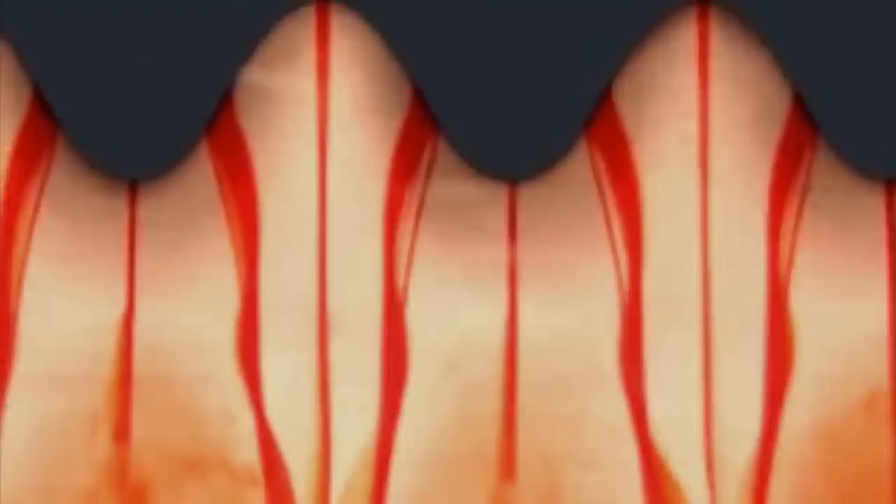Of course, what they did was make a patent on it. Patents are funny things, incidentally. One of the things a patent doesn't cover is private use. You can do this as long as it's non-commercial, or you can do it for education and research papers. Patents protect commercial use, so putting it into a patent means for private use, anybody can do this.

And that made me think, okay, what about if I stick some of those nodules or tubercles along this shape, seeing as this shape is so much like a whale's fin, would that give me an improvement?

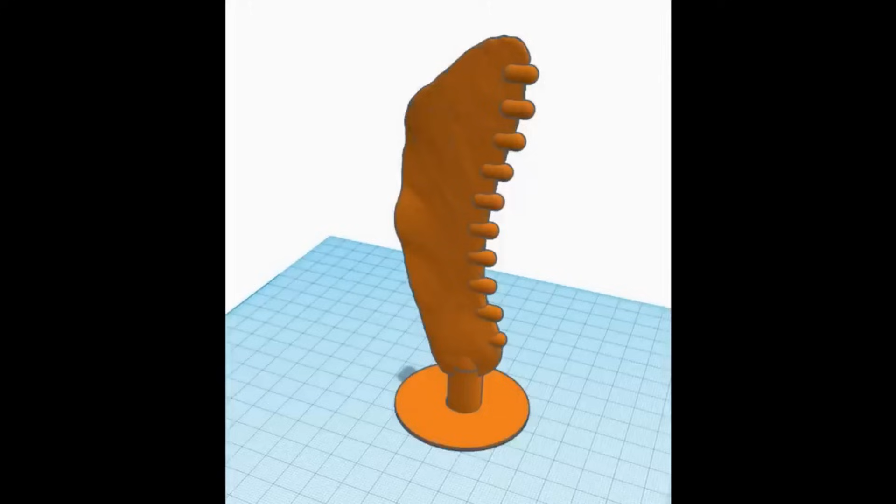Of course the first step is to stick a load of tubercles on, which is exactly what I've done here. Now, I'm going to update the file on Thingiverse and add this as an extra print if somebody else wants to test it and see whether it works or not.

But I've printed this off. Now let's print off 3 more and the nose cone. There we are with exactly the same structure, nose cone, 2 of the fins on and a handle, so I can hold it, a bit of steel rod going through 2 bearings, and it's free to spin in the wind.

So we put those on in the same way that we put this on, and we have 2 of those, and now we can have a sort of side-by-side comparison.

So to test that, we've come to a hill near where I live because we get a reasonable amount of wind. There isn't a lot of wind today anyway, but we'll do that test, and the test is going to be pretty simple. We're going to hold the 2 up together in a wind and see which one turns soonest and which one turns quickest, and that'll give us an idea of whether this is BS or not.

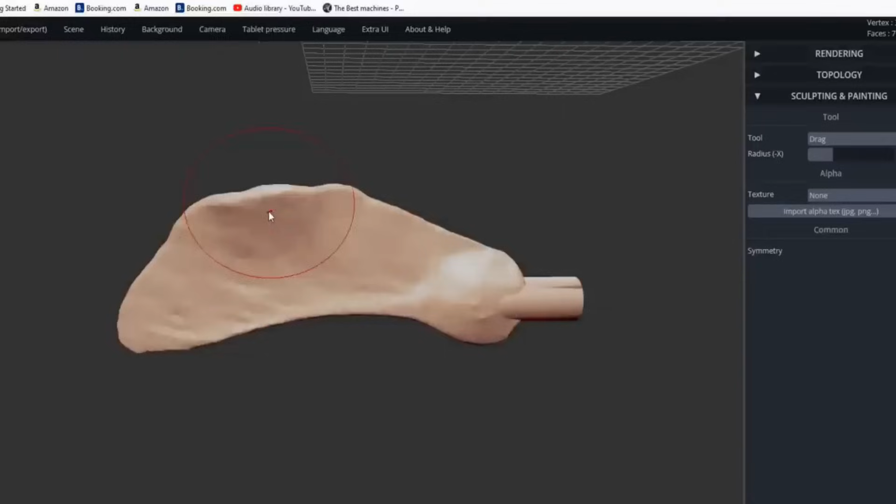So instead of brush, where we're going to lay things on, what we want is drag. If we hit drag, we'll be able to pull that as if we were pulling it. So we go over it and then pull it, and it will pull it out.

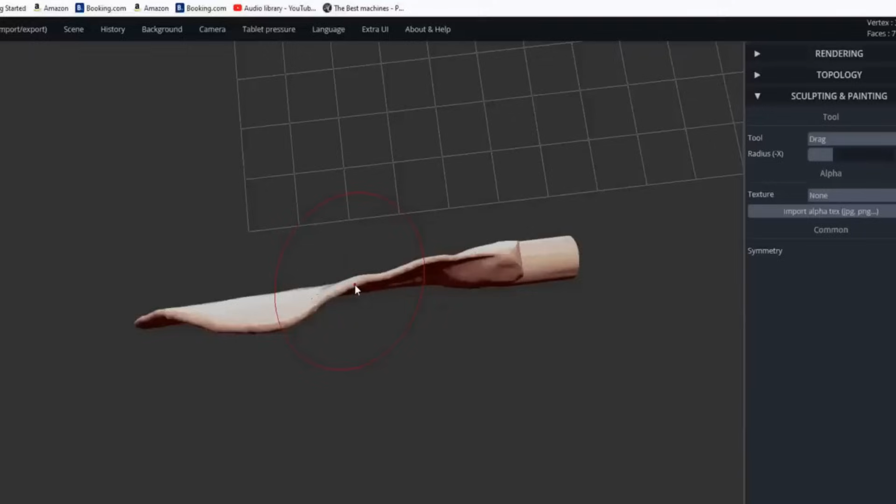That's so cool. Equally, if we go here and push down, it'll push it in. Now you'll notice there are actually 2 red dots appearing, that's because we've got symmetry turned on. If we turn symmetry off, then we'll only get 1 red dot appearing, and we can push with that 1 red dot on the area we're actually interested in.

I've got the grid showing here. Let's hide that grid. And there in scene, we've got show grid. Let's turn it off, and we've got hide grid.

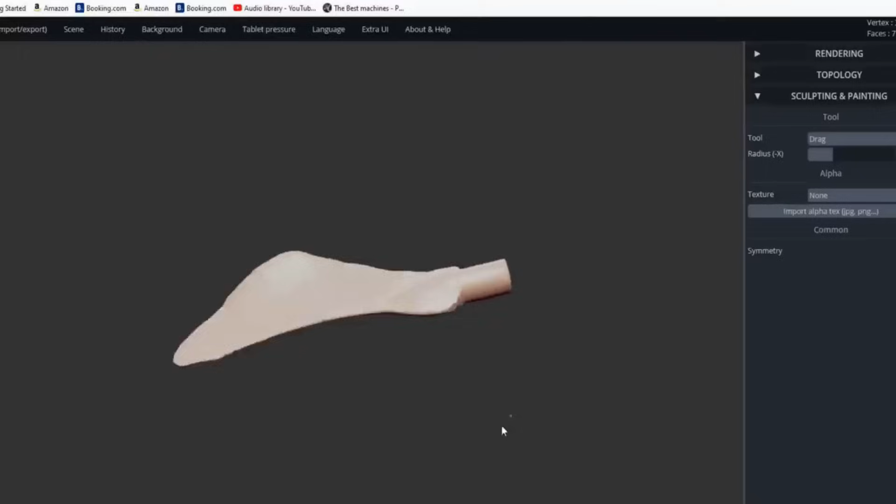In order to move in and out of this, you use the scroll wheel on the mouse. In order to spin around it, either right or left click, and you can spin around the model by going to different places and just spinning it around. If we want to move the actual model so that we can get closer to it, hold the Alt key and then left click and drag.

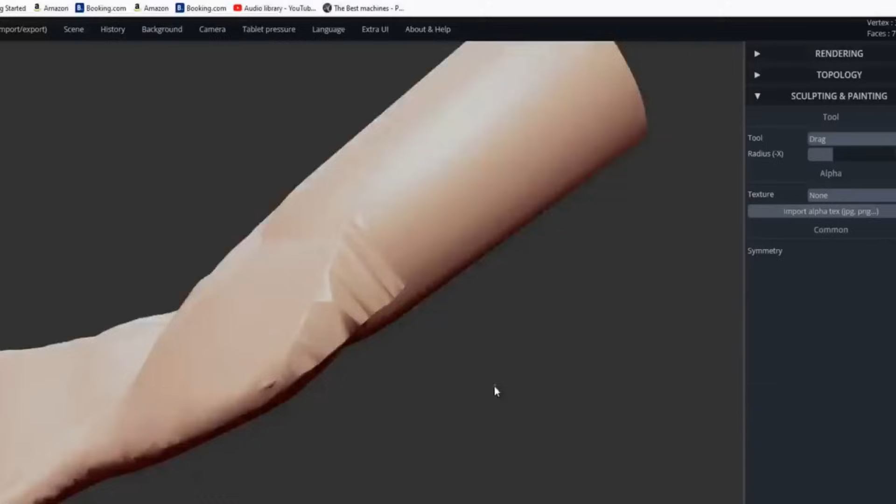What we're actually doing is moving the camera position, but it looks like we're moving the model. So we can move the model, and then we can zoom in on a particular portion that we're interested in. Then without holding down Alt, we can spin it around, and we can see how jagged that actually is.

To remove that, what we want is the smooth tool, and then we can smooth that area just by painting over it, again as if we were pinching it. That is beautiful. And then we can just smooth those edges to make them nice and smooth.

Again, if we go out and spin around the model a little bit, then if we get a lumpy area, we can choose to flatten it, or we can pinch it out, or we can smooth it, or we can do something called inflate. Inflate is where there's an area that maybe is a bit thin for you. So for example, here, let's inflate that.

And then if we hit inflate on there, what it'll do is act as if we're blowing behind the clay, and we'll fill that area out. And we can thicken up our leading edge by doing that.

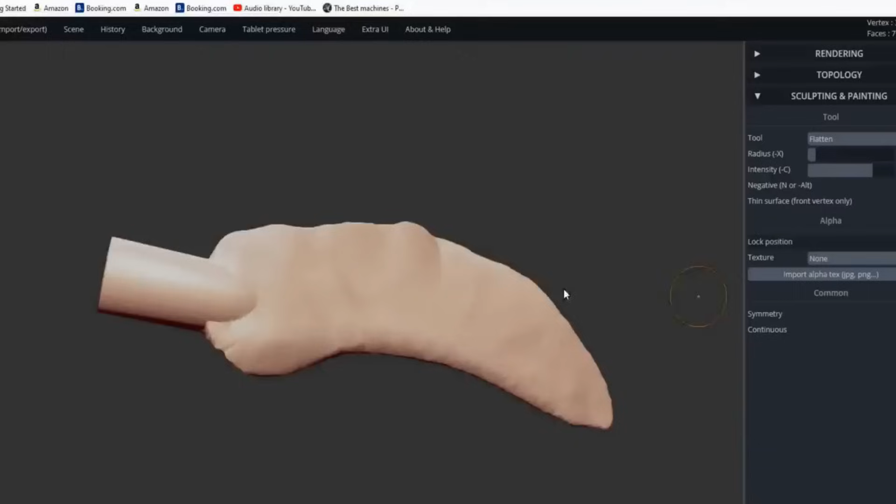And if we feel that's a bit too puffed out, of course what we can do is flatten it. And then we keep on doing that, dragging, pinching, flattening, smoothing, just like you would with plasticine or clay to get the shape that you want. So let's do that.

Okay, so this bit is actually magical. If we hit smooth and then smooth over the area, you can see all those nasty little lumps and creases disappearing as we smooth it.

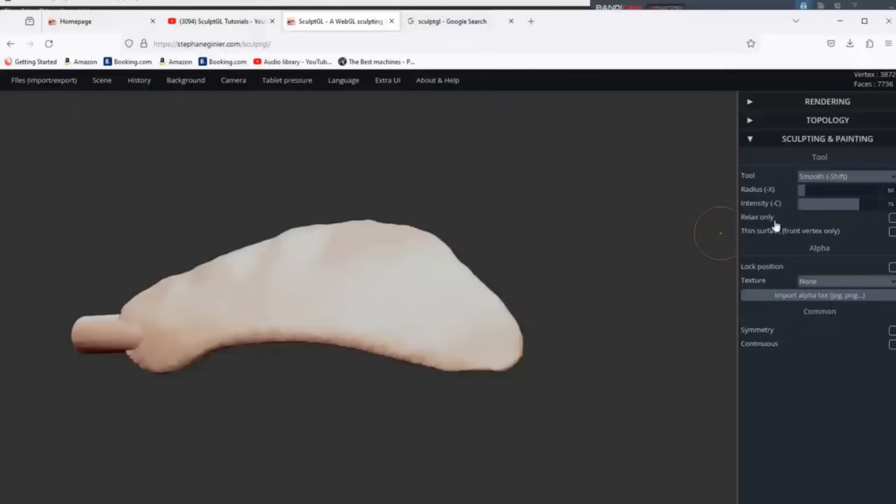Now you can change, if you look at that red circle, that's the radius of the smooth brush we're using, and as we use this slider bar here, we can change the area of the red circle, and that's where the influence of smoothing will be. This is true for all of the brushes, so we can smooth a huge area.

Okay, it's quite addictive, but once you've done that, of course, what you'll get is your rectified STL file, and that's our 3D model that we've smoothed everything out. We've pinched out the trailing edge so it's sharp, we've inflated the leading edge so it's got a bit more of a cut in it, and then we've smoothed all the edges out so it's more like a blade and less like a sycamore, and it's much more even.

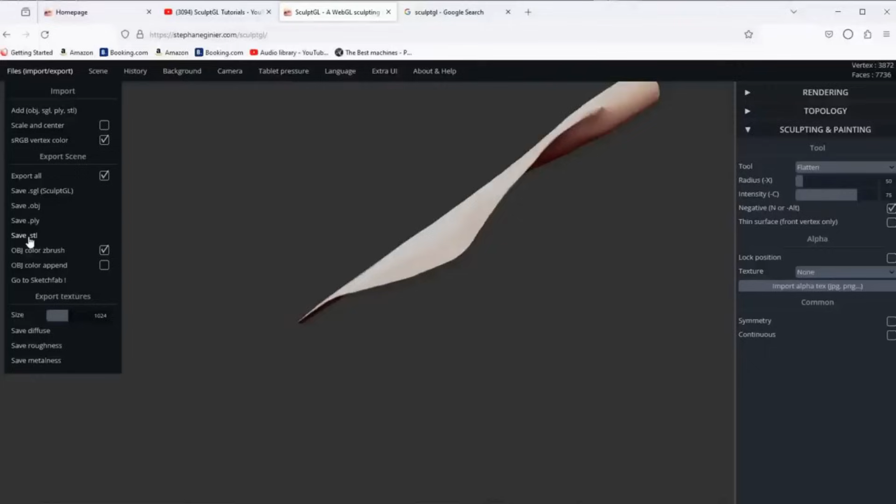So of course we can now export it. We export it by saving it as an STL, and there it is saved. Now let's print it.

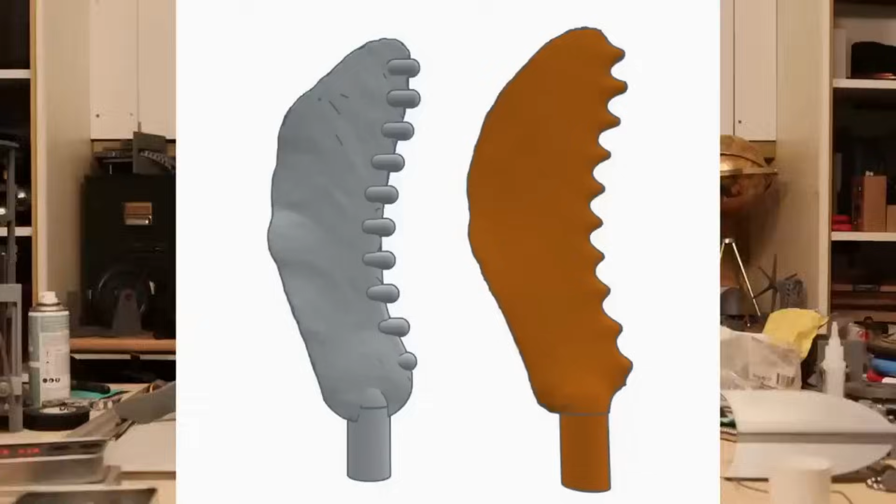And there it is printed, and it looks much more beautiful indeed. This is nice and thick like it should be, this is nice and thin, and as this was printing I checked the wing profile and it's much more like an NACA airfoil than it was here. We've also taken this drop out here a bit so that we've got a nice curve on there, so very much a nicer job. Of course what we want to do now is this one here, which is very lumpy, and of course I've done that, and this is what they look like in comparison.

So I want to print this one out and then we'll get a nice look at that, because this one is obviously a bit of a blade in general, and this one is one of the things I want to test. So these two blades, I'll be putting them on Thingiverse in case you want to have a look at them or play with them, but the whole idea has been to use SculptGL to take out the things that we can't get when doing combinations of scanning and modelling, to make them much more organic in their approach, and presumably they'll perform much better.

Now, this idea of sculpting in clay as a process is gaining a lot of ground when it comes to 3D modelling, and the things people are doing with it are amazingly incredible, and it is super intuitive. It was maybe 10-20 minutes before I was using that program - it took me an hour to learn how to use the cursor in Blender, and 20 minutes later I was producing something in this program.

So it's well worth giving it a go and adding it to your armory. Without a doubt there's always going to be people who say, why bother, just learn one program. Sure, but the problem with a program like Blender is it's just too much - you're never going to use those things, because all we want to do is smooth out a few curves. We don't want to make a 2-hour animated film of all the characters we've generated, and for that something like SculptGL is another string to your bow.

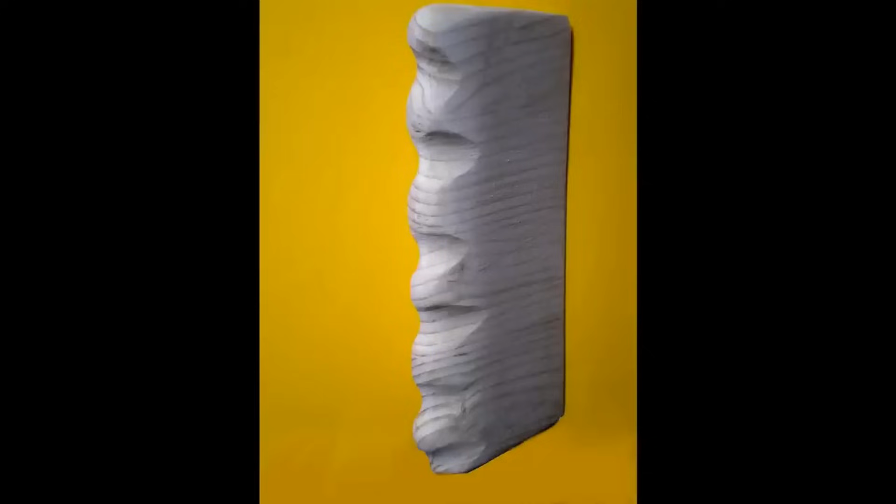Now if you look at the models that were made, they've been carved out of wood. The beginning of this is a wooden one. They've been made out of carved polystyrene, carved various bits and pieces, built up from clay, and although they tend to be sinusoidal, when you think about the nature of them, being a bit rough and uneven doesn't actually seem to make that much of a difference, so we can quite happily sculpt these in.

And when we're happy with what we've got, we can smooth the whole surface just by dipping your hands in some water and giving the clay a rub, and it will smooth everything out and make a nice smooth surface. When you're happy with it, which is pretty much where I am with this, we need to leave it to dry and make some kind of permanent representation.

Now of course I've got a scanner, so I'm going to scan this, but we could just make a mould of it by pouring some plaster of Paris around it when it's dry and leaving a split line, and then you'd be able to make as many as you wanted. So there are lots of ways to make a mould, and to turn it into a permanent model I'm going to scan because I have a scanner.

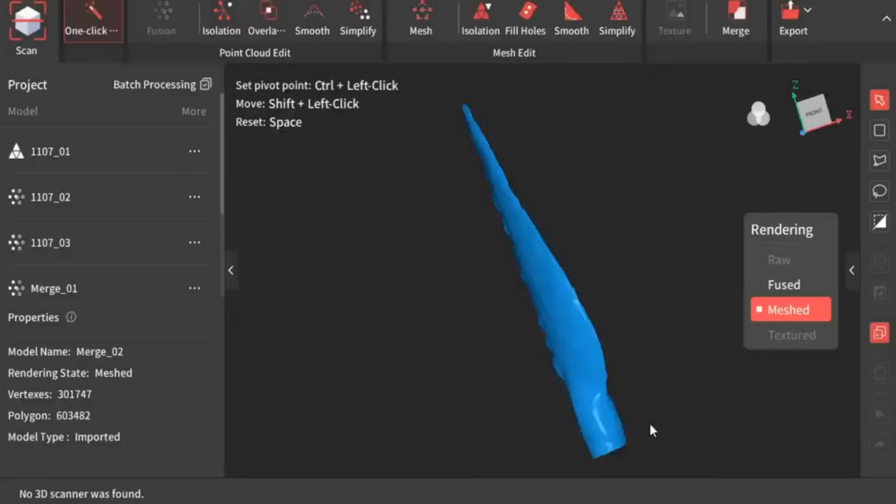And there is our 3D model of the Ingenuity blade with its tubercles. Now all we've got to do is print it off. Okay, and there it is printed out, and to be honest it's really quite beautiful, those curves are really smooth. So we've gone from this, the original Ingenuity blade, made this clay model with the tubercles on it, and then scanned it and brought this out, though we could have cast it.

Now, for all those who want to point out to me that I could have done this entirely on the computer, well, you are entirely right, but you may have missed the point, because there's a moral to this story. The moral is that the best way of doing something is always a balance, and different for different people, because it's a balance between the materials you have available, the knowledge you've got, the skills you've got, the tools you've got, and your own particular bent for the way you like to work. There is, in fact, no real best. It's one of those illusions that we seem to believe in.

Now, don't get me wrong, I think suggestions on how to improve things are awesome. But there's a difference between a suggestion on how to improve and telling somebody that's the only way to do something. If you're telling somebody that's the only way to do something, to be honest, you're wrong, because there's always loads of ways of doing any particular job, and half the time, if people think there's only one way, they just won't try and they'll give up. But there's a myriad of ways.

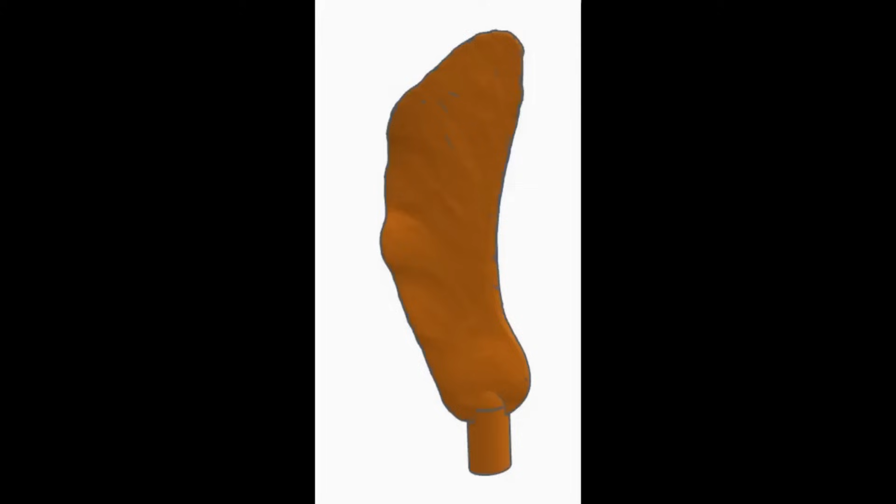So I've got this pedestal fan, and I've got it because I want a production fan blade - this must be pretty good at blowing air over you. The reason I want that is because I want to compare this to our Samara Seed wind turbine blade, which is supposed to act as a fan. Remember we covered this in tubercles to make this, and they were rather lumpy, so we smoothed those tubercles out to make this beautiful shape here.

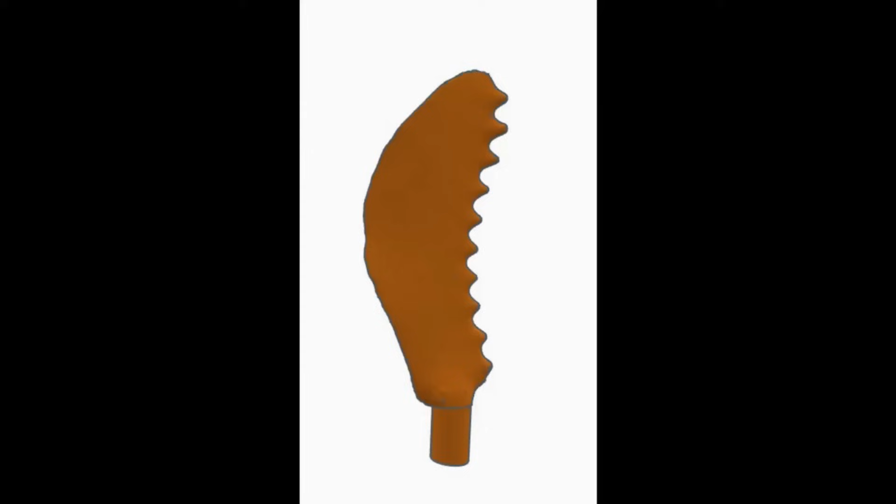Clearly what I've done is printed 12 of them and arranged them around that fan, because although we're doing it this size so we can get some kind of measurement out of it, if it's right that it's better and quieter, then it would make a brilliant PC fan. But we want to do a quick test on it, so we're going to do some kind of comparison between that and that to see how they do.

Now of course this is all on Thingiverse, and you can just download it, but there's a couple of things I want to point out to you. This thing, I want it to blow air over me. I want to take the air from behind and push the air out. So it looks like they're reversed, because this bit is the bit that should be cutting the air.

It should be spun that way so it can cut the air and then blow it out. If I twisted these in the other direction, I would have to spin it that way to do the job. So the only difference a twist makes is whether you spin it clockwise or anti-clockwise. If you want to spin it one way, twist it one way; if you want to spin it the other way, twist it the other way. So in that direction, I need to spin that anti-clockwise when seen from behind to get it to cut the air and blow the air over me.

What we need to do is see if we can get a measurement out of that, and have a listen, and see whether we can find out if it's actually quieter or not. So to do that, what I've done is I've stuck this blade on a bit of steel and I'm going to turn it in a hand drill so I can turn it clockwise or anti-clockwise to see which one might work. And I've got an anemometer, and I'm going to put that as close as I can get so it's blowing air over the anemometer and see if we can get a reading out of it. And obviously I'm going to do that with both of them.

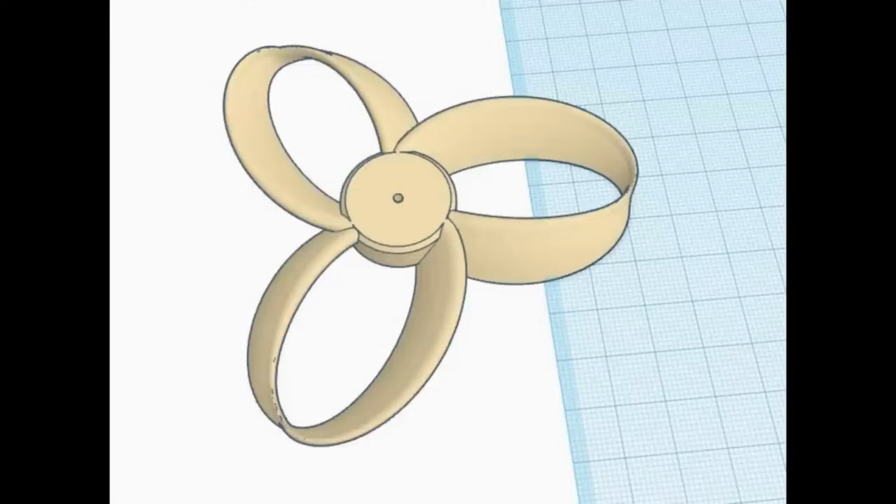So we compared that against that, and it was a bit rough and ready, but it certainly gave the impression that that worked better, and a lot of people pointed out that the test perhaps wasn't as fair as it could have been, and they were right, it wasn't. It was an impression. However, we do have this: the latest and greatest popular fan blade, the toroidal blade, that is supposed to work more efficiently and quieter than a standard blade. And I've tested this in a fan and it's certainly quieter.

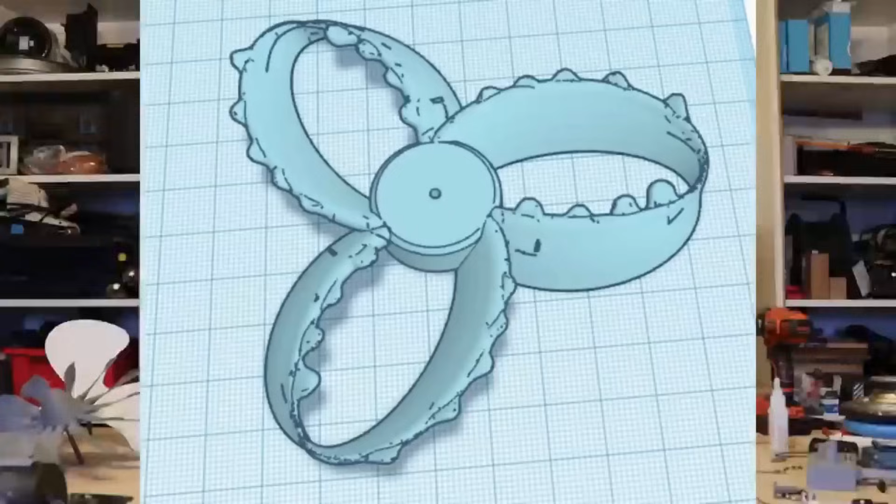So what I thought I'd do is test this with an identical one, but with tubercles added on, because I can print them and control that. So this one is without tubercles, and I got it from here. It is basically only 4 parts - well, 5 parts actually, if I think about it. There's the toroid blade, there's a foot, there's a cap, there's a body, and then there's this little motor that I got from Amazon that fits right in there.

And we can make a toroidal fan without tubercles first. That motor presses into the body, the toroidal fan actually goes onto there like that. It's a little bit of a press fit, but so it should be. And the front will glue on there, and the foot will glue on with the wire sticking out. So I've got it on a 3-volt battery, linked up in series, and we're going to read the amps and see how much speed we get out of the airflow.

That was 2 meters a second. So that one without tubercles was about 165 or 166 milliamps, and it pushed out about 2 meters per second on the airflow. Now let's give it a go with this one.

This one is the same thing, but it's just got the tubercles added, and we'll do the same stuff. We'll set it going, have a read at the amps, measure the wind speed, and see what we get out of it.

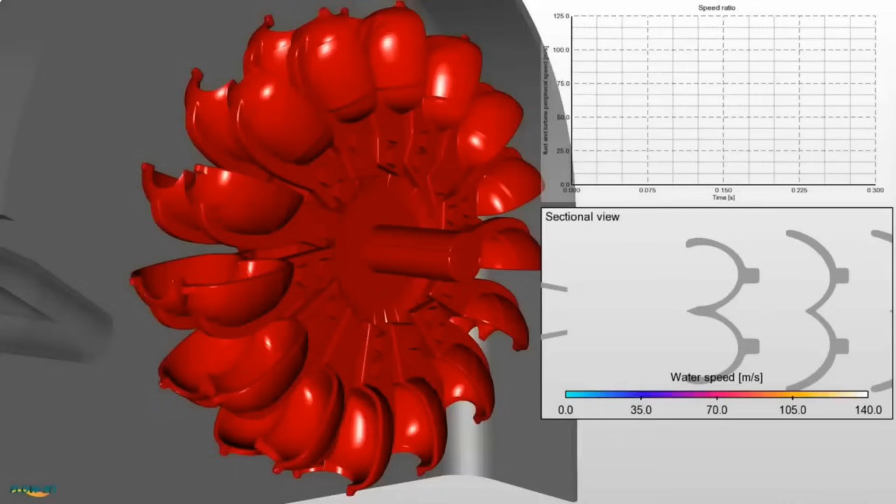Traditionally, there are two ways of doing that. The first way was just to use the dead weight of water to push a wheel - that's exactly what a water wheel was. But that has its limitations; they're not very efficient, so turbines developed, using a different method. Perhaps the most successful and efficient turbine is the Pelton wheel that came along in the 1870s.

It uses a jet of water aimed at some buckets, and it's what's called an impulse turbine. It can use the kinetic energy of the water and extract that energy as rotation. Later we got reaction turbines that extract both kinetic energy and pressure energy from it. But given this came from a whale, we should be able to turn it into a turbine blade, point a jet of water at it, get it to rotate and extract some energy out of it - or at least that's the idea.

So to explore that idea, I've created this turbine blade - just a smaller version of this. I took this design, chopped it off, shrunk it down a bit, and stuck it onto a PC fan. PC fans are great for testing because they're really easy to turn into generators. You just snap off the blades, take out the electronics, and solder a couple of wires to the coils you'll find inside.

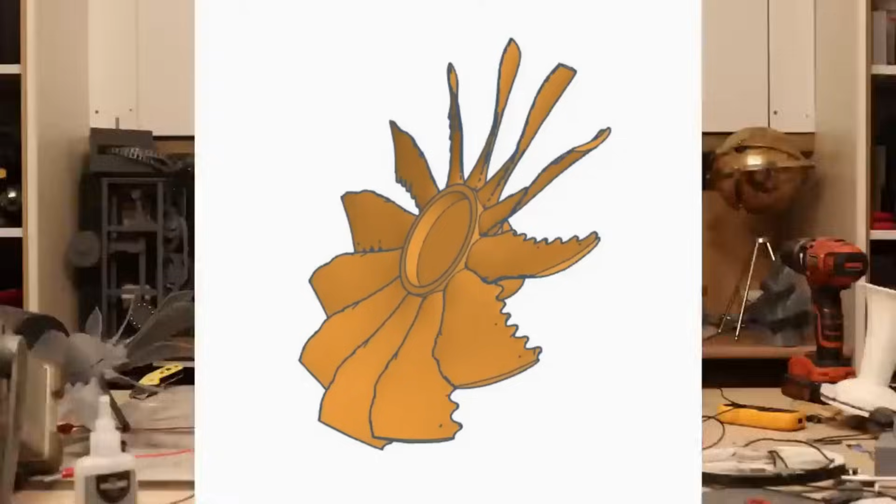So what I've done is taken this, and there's a little indentation on the reverse side that exactly fits on there - that's an 80mm PC fan, incidentally. I've glued that on and glued it to this backing board to hold everything stable. And what we're going to do is take this, point a jet of water at it, and see what happens.

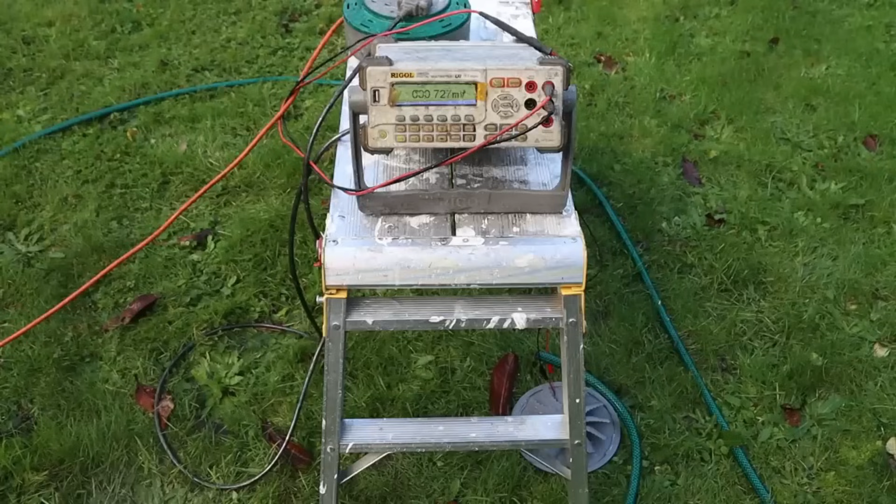Okay, we brought it outside. Let's turn the garden hose on it and see what happens. I mean, partly we know what's going to happen - I'm going to get wet.

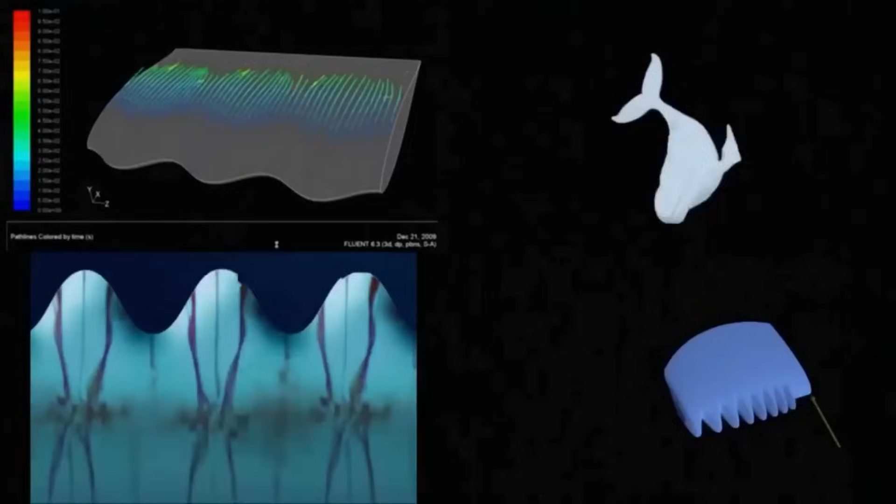Okay, that was cold. Now it definitely worked as a turbine. I couldn't tell you which kind of turbine it was, whether it was impulse or reaction. But apparently, when the water hits that blade at the point of the tubercle, the flow is separated, and that's part of why the drag decreases and the lift increases.

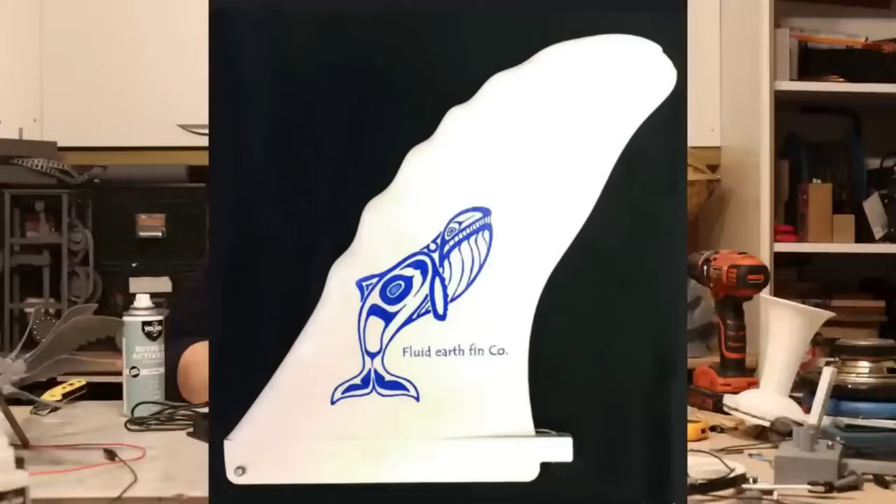Now these are beginning to creep in everywhere. You're seeing them in wind turbines at the moment. They've started to be put onto wind turbines and supplied as a kit for you to modify your own wind turbine. And you find them in slightly more bizarre places, like the fins of surfboards, that kind of thing.

But I've yet to see anybody looking at these in terms of water power generation. Now we use a water jet, but I would think with something like the Wave Dragon, for instance, it might be an interesting way to look at something like that.

The demand for sustainable and renewable energy resources has certainly intensified in recent years, probably due to the increasing global concern about climate change and the depletion of traditional fossil fuels. Among those various renewable energy options, wind power stands out as promising and eco-friendly, with the whole area probably being dominated by the traditional horizontal axis wind turbine.

But these turbines, well, they're not without their problems. They're prone to lightning strikes, and I consider them probably quite lethal to the local wildlife. If they're not built properly, they have a terrible propensity to fall down, because they only really work if you stick them up there in the air. If they overrun, that is, get too fast, the consequences can be catastrophic. And every now and then, they have a terrible habit of bursting into flames for one reason and another.

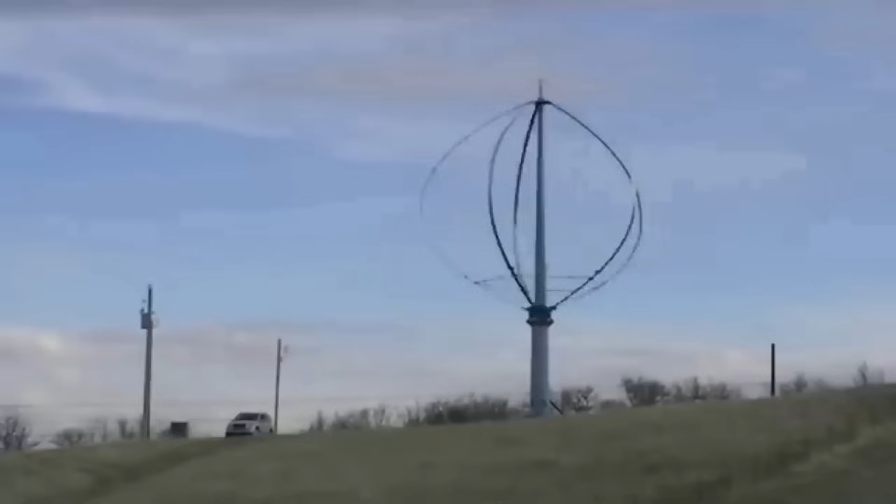There are several designs of VAWTs, the most common being types of Darrieus, Savonius and helical designs. The Darrieus design, characterized by a curved blade arranged in a helical shape, is particularly popular for its efficiency and aesthetic appeal. The major advantages of VAWTs are omnidirectional wind capture, simplicity and durability, low noise levels and scalability.

And the disadvantages, or if you like, the challenges and considerations? Well, the first one would be startup torque and cut-in speed. VAWTs typically have higher cut-in speeds and require a minimum wind speed to start generating power, and that can be a limitation in areas with lower than average wind speeds.

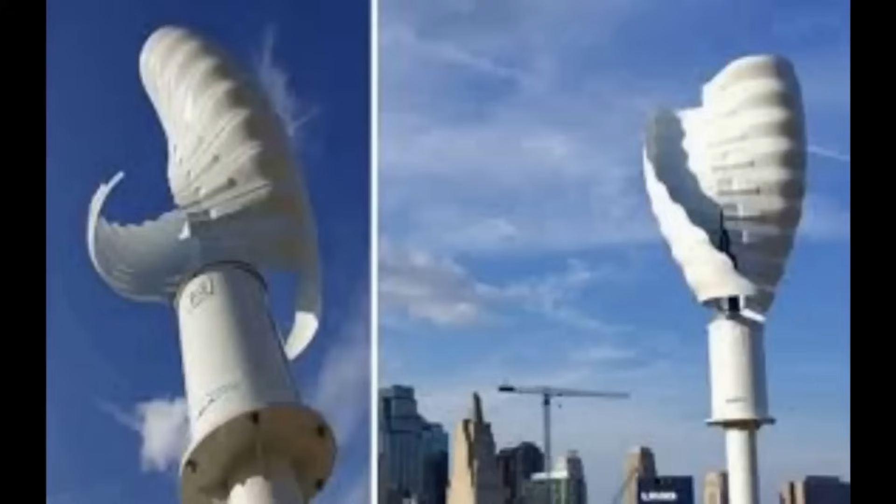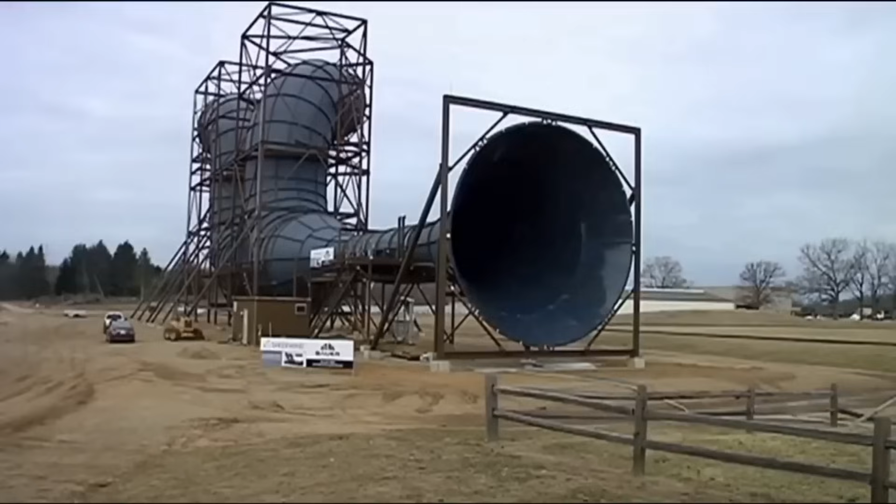The second is efficiency at low wind speeds. While VAWTs are brilliant at capturing wind from various directions, their efficiency at low wind speed is generally lower compared to HAWTs. And the final one is aesthetics and public perception, because although the unique designs of VAWTs can be appealing, some folks find them less appealing than the conventional HAWT with the familiar three-blade design. Public perception and aesthetics can seriously impact the widespread acceptance of new technology like VAWTs.

But generally, VAWTs are a promising avenue for harnessing wind energy with distinct advantages. However, more work is required.

In the quest for more efficient and sustainable energy solutions, researchers and engineers are increasingly turning to nature for inspiration. Biomimicry is the practice of imitating biological systems and processes to solve human problems, and that's led to innovative designs across a whole range of industries, the notable example being the integration of whale tubercles into wind turbine design.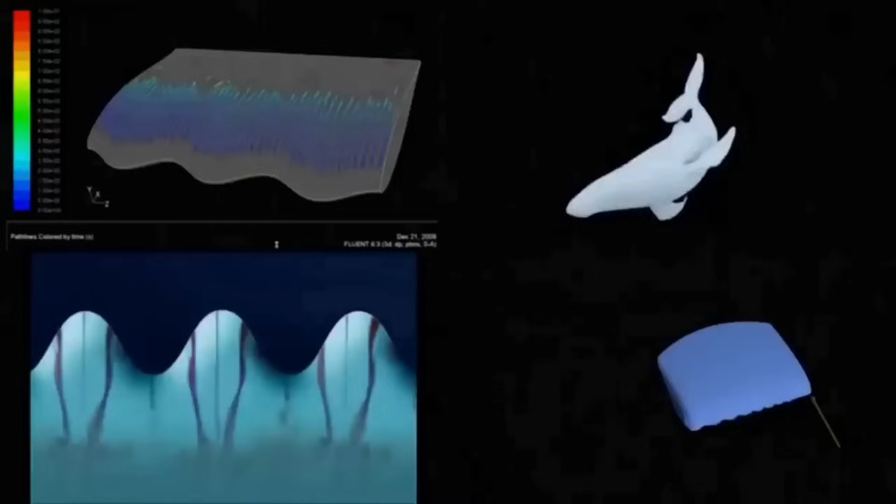Whale tubercles are small rounded protrusions found on the leading edge of humpback whale flippers. These tubercles are not merely pretty, they serve a critical purpose in optimizing the whale's hydrodynamic performance. Researchers revealed that these bumps alter the flow of water over the flipper, reducing drag and increasing lift. This, of course, makes it a natural adaptation, and that's captured the imaginations of scientists and engineers seeking to enhance the efficiency of man-made structures.

Particularly wind turbines. So in order to look at all of that in a practical way, what I've done is I've created this. This is the blade for a VAWT that we're going to put together.

That one is without tubercles and that one is with tubercles. Now it's a very simple design, it's just 3 blades, and you'll find this on Thingiverse, so the link is in the description below if you want the files.

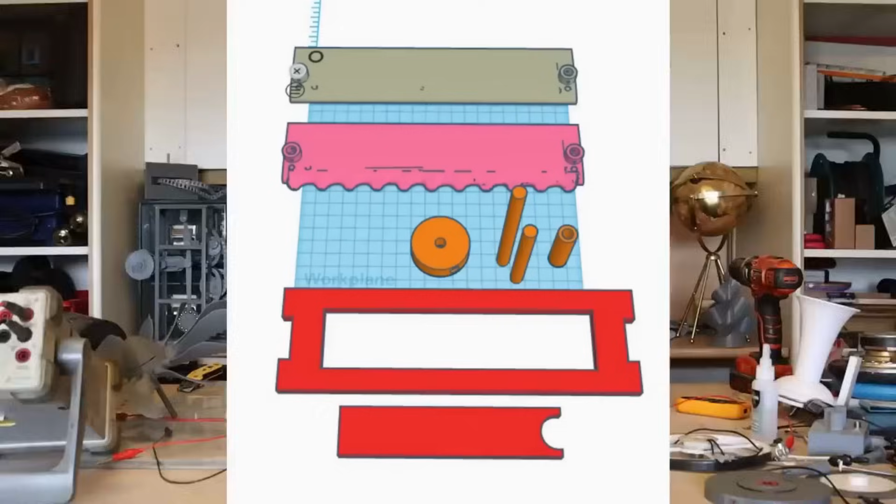But there are 3 blades without tubercles, and we're going to arrange them into a VAWT. To do that we've got these 2 tops and bottoms, and they've got holes in them at 120 degrees and a central hole, and then you should have 8 of these and 1 of these. 6 of these just get jammed into those holes.

You can glue them in with cyanoacrylate glue, and we do that with the top and the bottom, and then once we've done that we stick those into the blades, making sure that the leading edge is all the same direction. When you've done that, that's what you'll get.

Now you'll have 2 more at the same length. One goes in from the top, one goes in from the bottom, leaving a little bit stuck out. Then you'll have 2 of these, they go onto there, and we do exactly the same with that one.

When you've got that far, you'll find a shorter one. These are 100mm long, this is 75mm long, and it goes directly in the middle like that.

And of course what we need is a couple of couplers. So you slide a coupler on there, and then another coupler on that side, then you pop that in between, put a bit of glue on there and slide it up so the coupler is halfway between the 2, and you do that both sides and that will hold it together. When you've done that, grab yourself a couple of 8mm washers and put 1 on each side.

And then a bearing on each side. These are skater bearings, so they're 22mm by 8mm by 7mm thick, and they go on either side like that. And then we're ready to put that into the cradle.

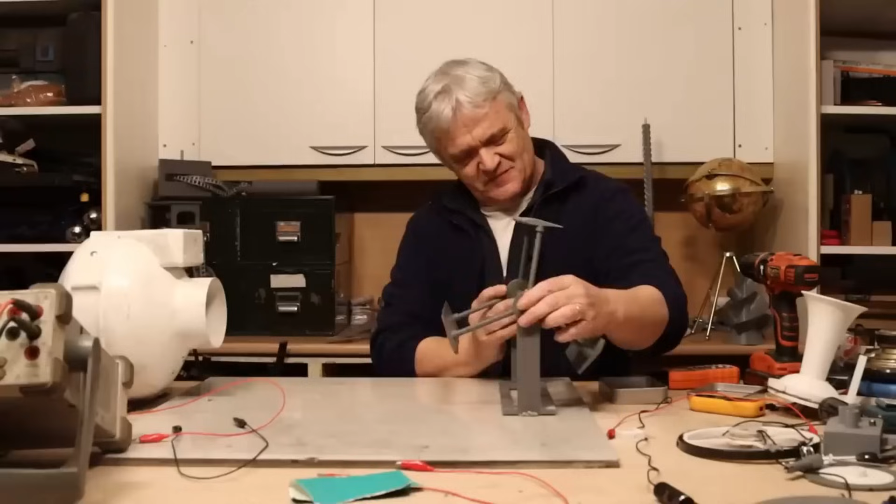So we're getting about 100 RPM. And here's my tubercle version all put together. We've got the same metallic strip there. We're going to clip it in the cradle and see what happens. We're getting 149 RPM, which is pretty cool, eh?

So research is showing that integrating these tubercles into VAWTs has 4 serious advantages. The first thing is it increases efficiency at low wind speed, which is of course one of the banes of VAWTs. The next thing is it reduces noise and vibration, and perhaps a knock-on effect of that is it increases durability, giving them a longer life and reducing maintenance costs. So the last thing is it increases energy capture in turbulent winds, and that is one of the key advantages because these kind of turbines really should be used in urban environments where the wind is always turbulent.

Now I've put it this way just to test it, but it doesn't really matter if it's in that direction or if it's stood upright. It's easier for me to put it into a cradle to test it for you and to have a quick example, but there's a lot of ongoing research based on this biomimicry, and tubercles are really looking like they're going to make a significant contribution, so I thought I would do a video of it.

Now of course these files are available if anybody wants them, and if you just want the blades by themselves to save you drawing them, then just take the blades by themselves.